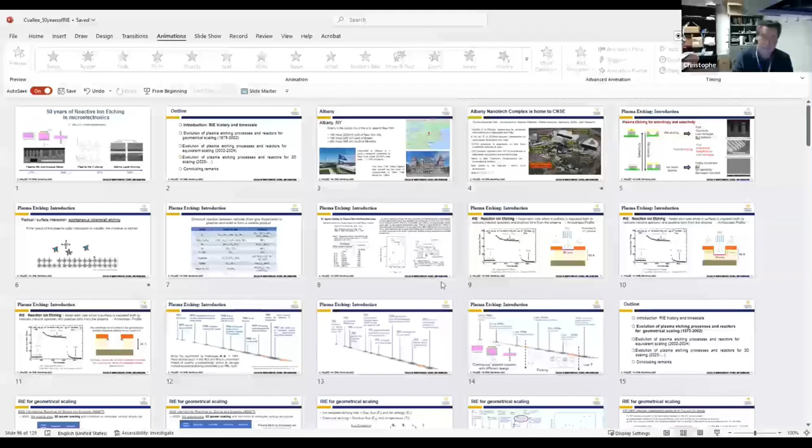So I did a presentation on about 50 years of reactive ion etching. The idea is to show the evolution of the etching processes and the etching reactor, going from plasma RIE with a continuous wave, where we just change the design of the reactor, to pulsing plasma at the beginning of this century, and now going to pulsing everything, for example to go to atomic layer etching. So I will try to illustrate the evolution of the processes and the reactor from the beginning to now, and I will try at the end to give some description of what we can probably work on for the next 5 years or next 10 years.

So this is the outline of this presentation. First I will try to have a very fast history and timescale of RIE. And I will try after to show you how to correlate with the scaling of these transistors. For example, we can do a good correlation between the scaling of the transistor and the evolution of the plasma etching processes and tools.

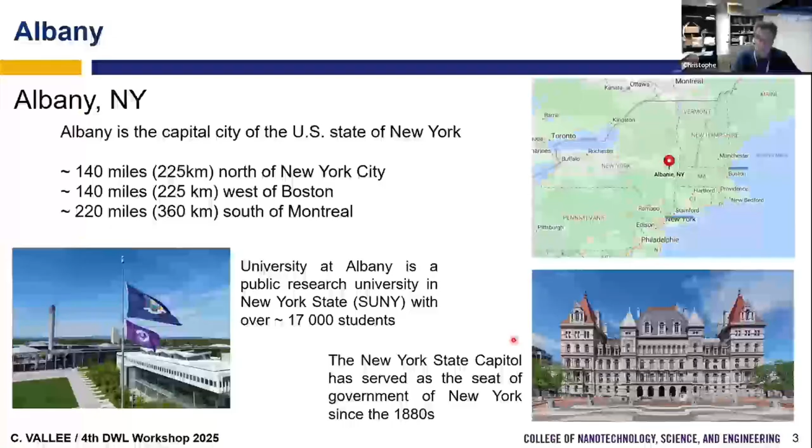So first, just to introduce Albany. I'm professor at University at Albany. So Albany is here, in the New York State. It's about 2 hours and a half by car from New York City, about 3 hours to Boston, and 3 hours and a half to Montreal. So Albany is a New York State capital, and this is where I'm doing my research.

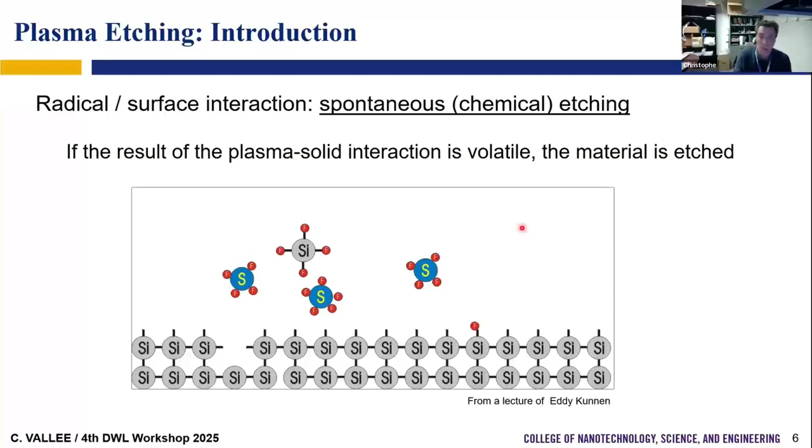So for chemical etching, this is the first step we do when we do plasma etching. We need to understand what can be the volatile byproduct. Depending on what product can be volatile, for a given solid material we want to etch, we have to select the gas we will use for the etching.

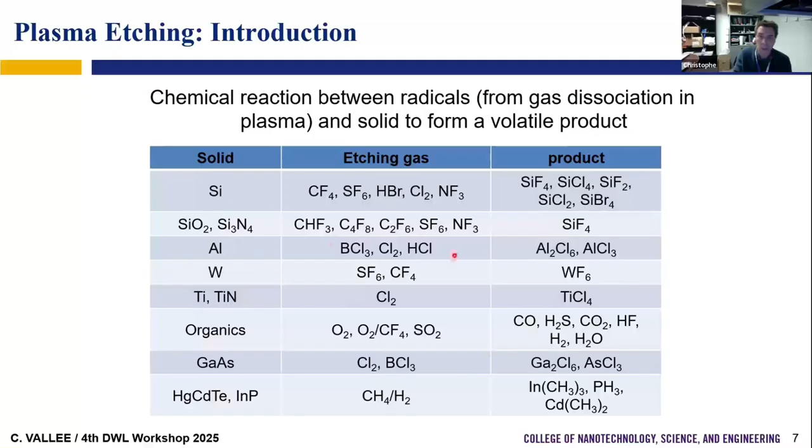So if you want to make SiF4, you select a fluorine-containing gas. If you want to make SiCl4, you select a chlorine-containing gas, and so on. If you want to etch aluminum, aluminum fluoride is not volatile, so you will etch only with chlorine, for example, to make a volatile byproduct. If you want to etch a polymer, you use oxygen to form CO or CO2 and water, which are volatile byproducts. So this is the first step for any plasma etching process, just to understand what can be volatile for etching a solid, so we can design the gas we can use.

What is very interesting is that in 1974, a Japanese group found that we can enhance the sputtering when we want to do the etching, if instead of doing sputtering with a rare gas, we do sputtering with chemical ions. If we have chemical ions, then we can enhance the sputtering. So this is the first paper where people observed that by using ionic assistance with chemistry, we may enhance the etching rate. This is the beginning of reactive ion etching.

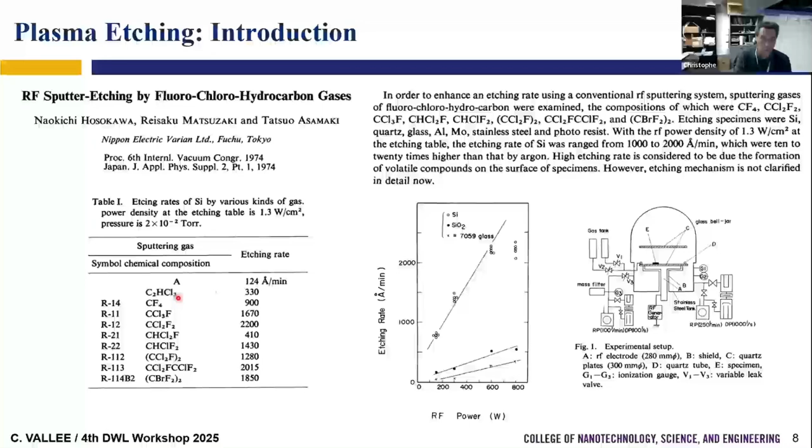You can see a huge improvement of the etching rate compared to pure argon when you use chemical ions. This is reactive ion etching, and it's easy to understand with the work that everybody uses to explain RIE in any plasma class, the work from Coburn and Winters.

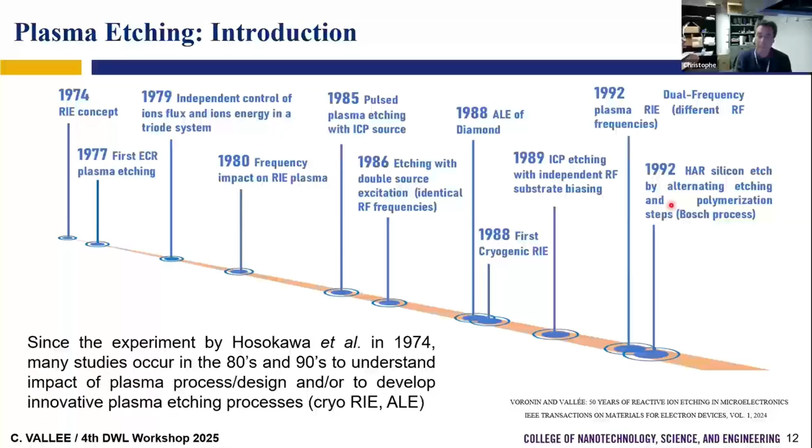Here I gave a sort of timeline of some important research and publications, and I will extract some of these later in my presentation to explain that after this first concept, many people tried to understand how to improve the RIE process by playing with the frequency of the generator, by using for example ICP sources, by having independent RF biasing, by using cryo, by using dual frequency, and so on. So people spent 20 years trying to understand plasma etching and the impact of plasma design and plasma parameters on RIE.

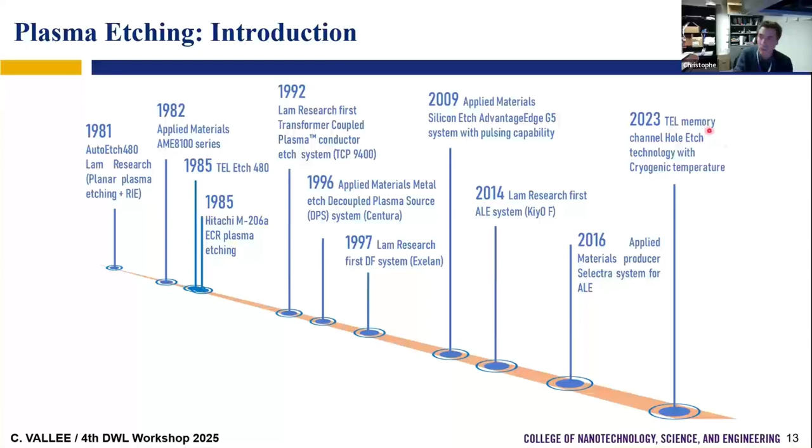So I can take this timeline of reactor generations from industry and select three timelines, and I will discuss today these three timelines.

The first timeline is where we changed the design of the reactor but still had a continuous plasma process, where the power is always continuous and the precursor is always introduced in a continuous way. After that, we have the second type of design where we started to pulse, first the plasma, and after that we also started to pulse the precursor and the gas, going from plasma pulsing to ALE, for example.

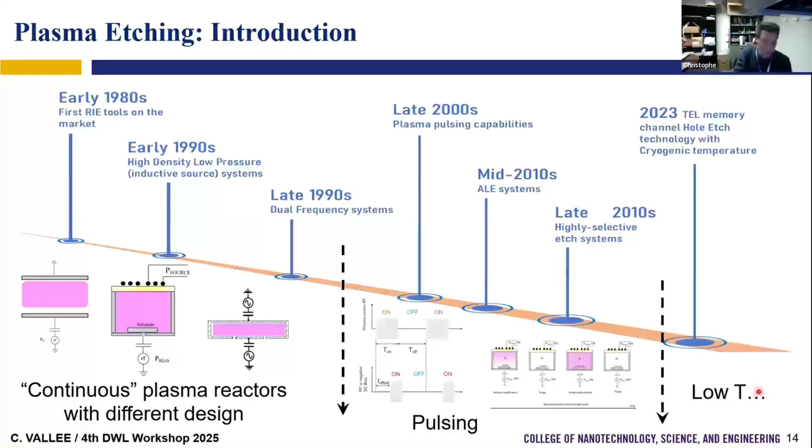And now we have the new generation of reactors, where maybe we have to play with new parameters we weren't playing with before, like for example going to low temperature. So this is the end of this very fast introduction, and now I will talk about the first design, for the geometrical scaling.

This is something I like, what we have for the transistor: we have three areas for the transistor. The first scaling area was a geometrical scaling for the transistor to follow Moore's law, where we did always the same transistor but just reduced its size and dimensions. So it's the same silicon, silicon oxide, polysilicon transistor, but we only reduce all the dimensions to be faster. So we have a size reduction, what we call geometrical scaling, done thanks to lithography.

After that, we add what we call equivalent scaling, when we introduce new materials and start to go from 2D to 3D devices. New materials like high-K, and with high-K we add an equivalent oxide thickness. This is why we talk about equivalent scaling, a second generation, a second scaling area. And from IRDS, it's said that since this year we are entering the third scaling area for the transistor.

This is 3D power scaling, because now we go to complete transition vertical structures. So what I want for today is what I tried to do: identify the etching process and the evolution of the etching process corresponding to each scaling.

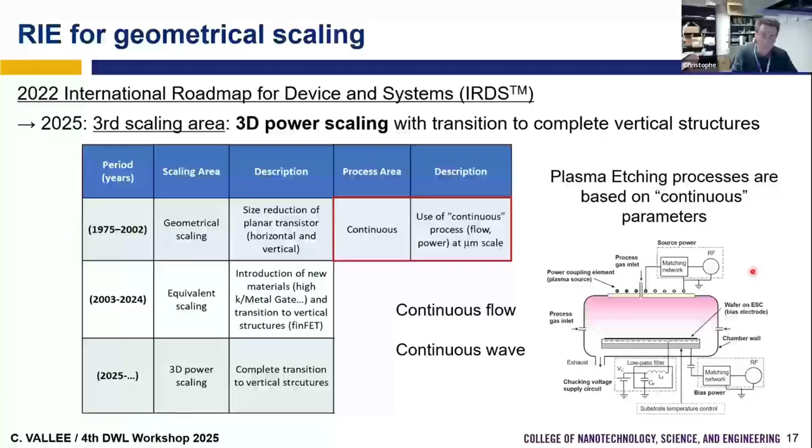Today I will try to focus on the design of the reactor, going from single frequency CCP reactor to high density plasma reactor and dual frequency plasma reactor. So to understand why we did this evolution of the design, I just tried to go back to a very simple understanding of a plasma etching process.

When we do a plasma etching process, we have ion-assisted etching. If the process is mainly based on ion assistance, the etching rate will be proportional to the ion flux and the ion energy. And we have the chemical etching process, where the spontaneous etching depends on the radical flux and temperature. So these are two main parameters every time we have, for chemical etching or ion-assisted etching.

So in the very first generation of plasma etching reactor, I will say single frequency CCP plasma reactor, you apply a power with a single generator. With this power, you will fix the plasma density, so you will fix the ion flux and the radical flux. Usually the temperature is fixed. And depending on the power you apply, you will also fix the DC self bias, so you fix the ion energy.

Each time you modify the power applied to the substrate, if you increase the power, you increase the ion flux, but you also increase the ion energy. This means the parameters are coupled. You cannot only increase the ion flux without increasing the ion energy, or increase the ion energy while decreasing the ion flux. So all parameters are coupled, and none of them vary independently with time.

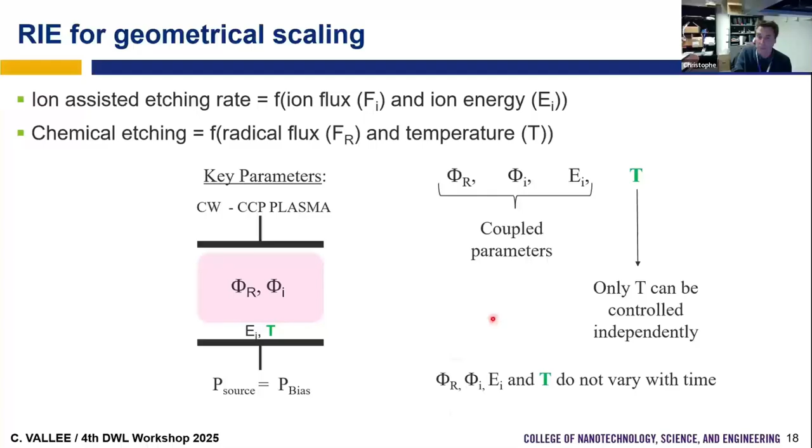So we can understand that, from a processing point of view, to improve the capability of the process, maybe we could ask: can we uncouple some parameters, or can we modify some parameters with time during the process? This is where I go back to some important literature that helps us understand how we can modify a plasma reactor.

The first paper I will take is this one from Australia, from Ron Boswell and Perry, who were first, to my knowledge, to show that we can have fast anisotropic etching with an ICP source. So now we have inductively coupled plasma reactors—we generate the plasma thanks to the inductive field and not the capacitive field, and we have an independent bias of the substrate. So we have two powers: one for the plasma density and one to control the ion energy. This gives very good anisotropic etching, with an independent bias to control ion energy. They were the first, to my knowledge, to demonstrate this fast anisotropic etching with independent RF substrate biasing.

This is the idea of what we call the HDP source or inductive source—mainly inductive, but a microwave system can also be used in the HDP source, where we now have independent control of ion flux and ion energy.

So the idea is, going back to this device: with the power applied to the coil, what we call the power source, you fix the plasma density, so you fix the ion flux. And with the power applied to the substrate, you don't modify the flux, but you modify the DC self bias and the ion energy. So you have a bias power to control ion energy and a source power to control ion flux.

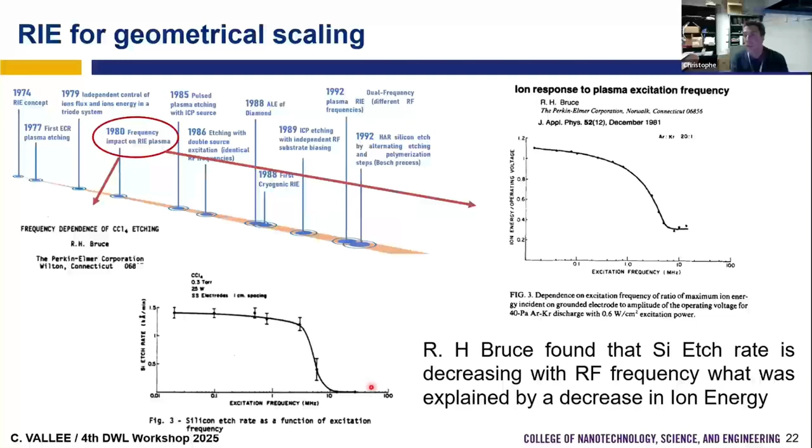So he observed a very huge drop of the etching rate, and the drop of the etching rate was explained by the fact that the energy of the ions is decreasing. So he observed that when we go to very high frequency, we decrease the energy of the ions.

But if you increase the frequency generator, you decrease the peak-to-peak voltage. So at the same time, you decrease the ion energy. And so you decrease the etching rate, as was observed by Bruce.

You not only decrease the ion energy, you can also, with the frequency generator, modify the shape of the ion energy distribution function. If you have a high frequency generator, you have low energy ions with a narrow distribution. If you use a low frequency generator, you have energetic ions with a large energy distribution. So to try to understand this shape, I did a very simple schematic.

First, for example, we use a 13 megahertz generator. Usually this frequency is higher than the ion plasma frequency of the ionic species in the plasma. If we don't consider very light ions like hydrogen, the plasma frequency is several megahertz, so it's lower than 13 megahertz.

So what does it mean? I have ions in my plasma. They are at the plasma potential. I will apply to my substrate an RF voltage, 13 megahertz. So my oscillating frequency is 13 megahertz, and I am oscillating around what we call a DC voltage, VDC, the DC self bias.

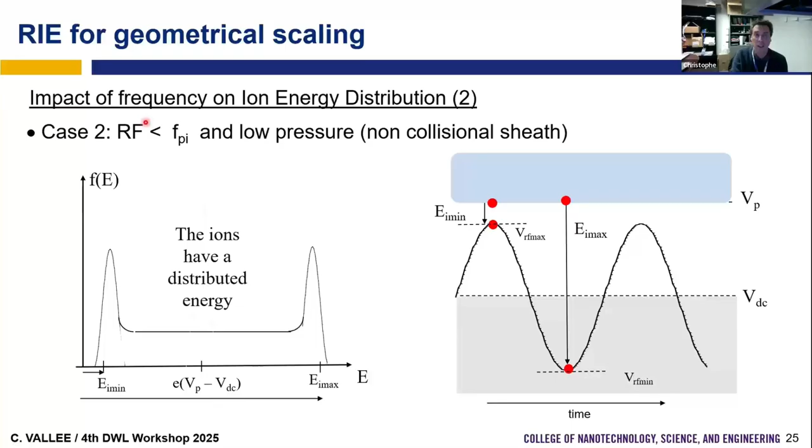Now if I go back to this case where we apply a low frequency generator, for example hundreds of kilohertz, this frequency is lower than the ion plasma frequency. What does it mean? It means that now the transit time for the ion to cross the sheath is very fast compared to the time of the oscillation.

So now the ions will take, as they transit, the instantaneous value of the RF voltage, and not the VDC. So we now have a broad distribution of the ion energy, because they can come from the minimum energy to the maximum energy, taking all the energy in between. So we have a narrow distribution in one case, but the energy of the ions can be much higher than the energy of the ions with a high frequency generator.

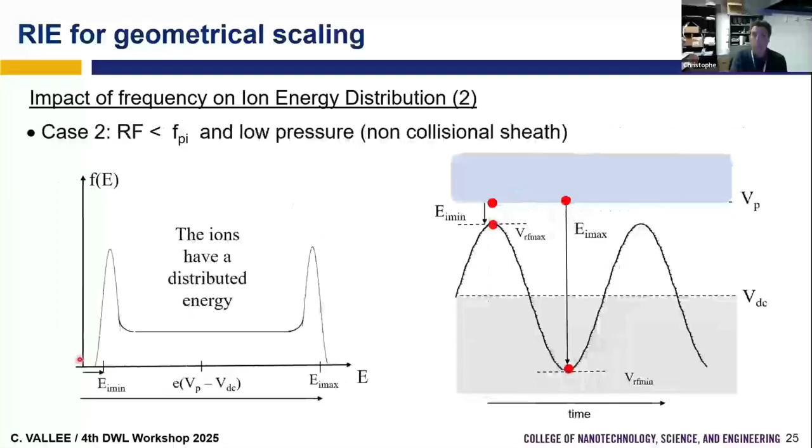So we go back - this is what we obtain: high energy compared to low frequency, and large distribution versus narrow distribution. Usually when we do plasma etching, we have multiple ions with different mass, so what you have on your substrate are ions coming with different energy distributions. It can be very large for light ions, or very narrow for heavier ions. I took here an example of different mass for different ion plasma frequency.

So it has been observed that if we play with frequency, by increasing or decreasing it, we can have energetic ions or low energetic ions. Low frequency generator gives high energetic ions; high frequency generator gives low energetic ions.

And we had the same with the plasma density, so with the ion flux. What we can say is that the power absorbed by electrons is found to be proportional to the square of the frequency and vary linearly with the RF voltage. So for a constant RF voltage, the plasma density, which is proportional to this number, will probably increase like the square of the frequency of the generator. So if you increase the frequency of the generator, you increase the plasma density, so you increase the ion flux.

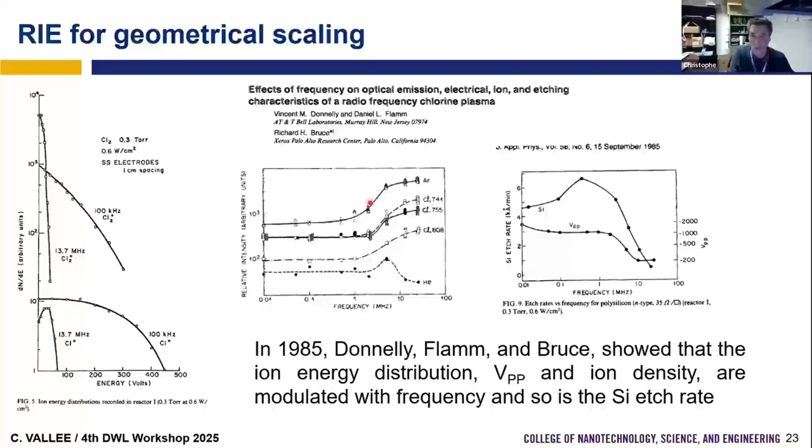And so we go back to what was observed: as you increase the frequency, you increase the plasma density. So we can see we have two opposite behaviors of ion flux and ion energy with frequency. High frequency: more dense, but less energetic. Low frequency: less dense, but more energetic.

So this is what we have, for example, for a fixed power applied to the substrate for a single frequency plasma etching process. If we use a high frequency generator, like an 80 megahertz generator, we'll have a high ion flux. But since we have a very high ion flux, the current flowing to the substrate is high. So for the same power, since we have more current, we develop less RF voltage, or less peak-to-peak.

And if we develop less peak-to-peak, we develop less DC bias. So the ion energy is low. First, we have a high frequency generator - we may have high ion flux, but low energy.

If we use a low frequency generator, in this case 13 compared to 81, the ion flux will be less and the plasma is less dense. But since we have less current flowing to the substrate, we develop more voltage peak to peak, so we develop more DC bias, so we have more energetic ions.

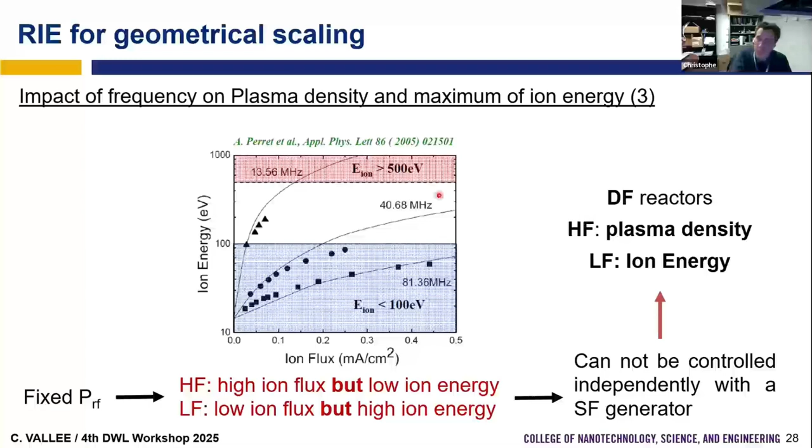So we see opposite behavior of the frequency for the flux and the energy. But if you have a single frequency generator, you cannot decouple them. So the idea is that maybe we can use a CCP with two different generators, where we can have a high frequency generator to control the plasma density, the ion flux, and a low frequency generator to control the ion energy. So this is what we have.

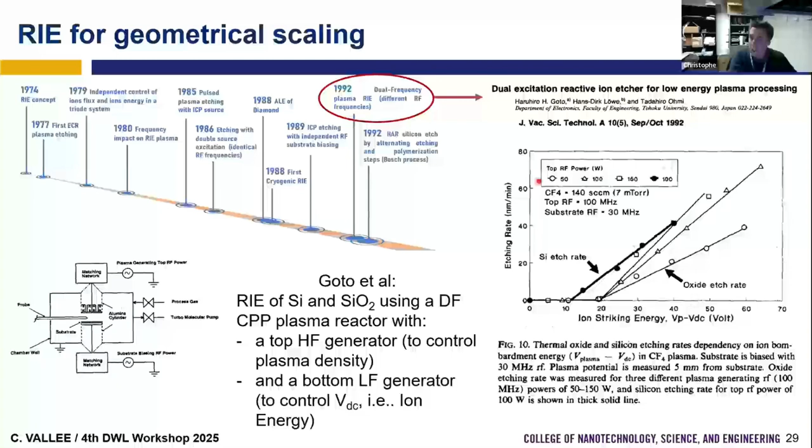Here we have the first paper where people try this idea of doing a plasma reactor with two different radio frequency generators, from Goto, where they use a high frequency generator at the top to control the plasma density, and a low frequency bottom generator to control the DC self bias and ion energy. They study the etching of silicon and silicon oxide using this dual frequency process.

You can see with this paper that depending on the frequency, if you increase the frequency of the generator at the bottom, you will develop less self bias because you develop less peak to peak voltage. So the DC self bias is low, and we say the ion energy is Vp minus the DC self bias, so the ion energy will be low.

But if we use a low frequency generator at the bottom, now we develop more DC self bias, so we have higher energy. So it is better to use a low frequency generator to have high energetic ions coming to the substrate.

And for the top electrode, they also study that if they modify the radio frequency and go to high frequency, they can increase the plasma density. And they look at how it will impact the self bias.

So they have all the results that we had in HDP sources, where we have an independent control of the plasma density and the ion energy, and denser the plasma, lower is the ion energy. So this is what has been found.

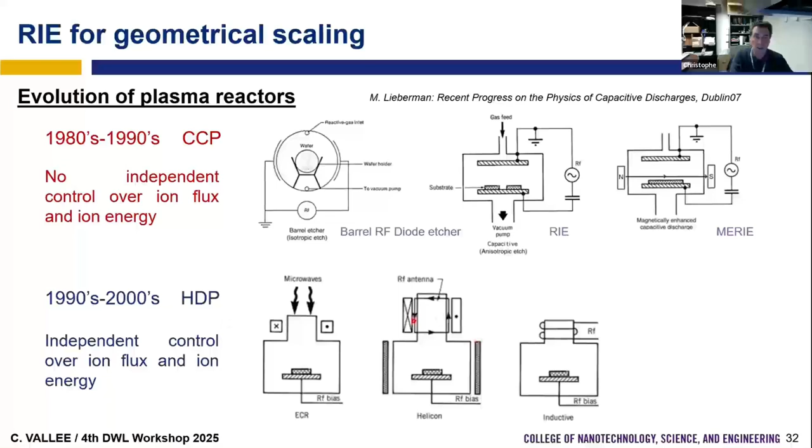And we have the third generation, where we go back to the CCP design, but now we use two or three different frequencies. The frequencies can be applied only at the bottom, two at the bottom, or one at the top and one at the bottom, or one at the top and two at the bottom. So depending on the tool maker, you have very different designs depending on what you want to do and what you want to etch. You may have diode, triode, different designs.

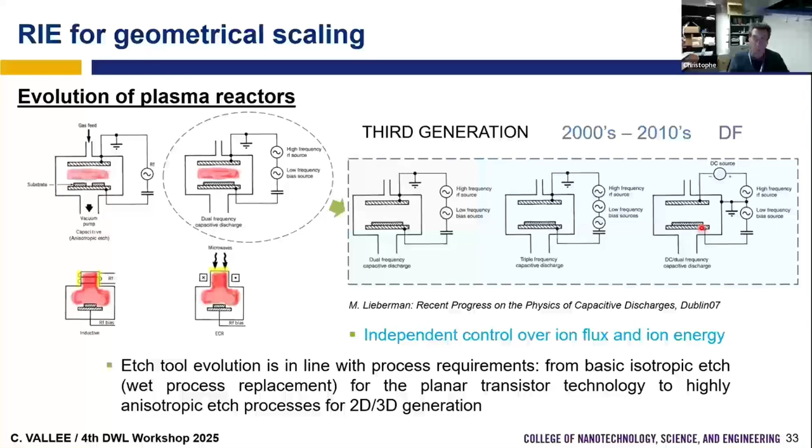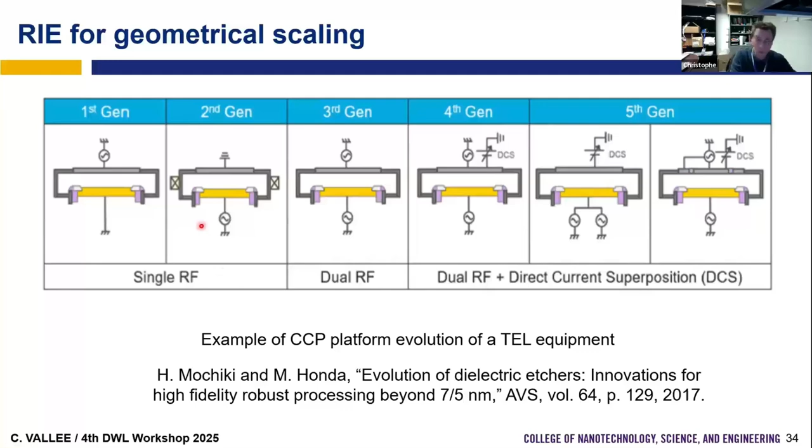When we found RIE and we can use ions, so we modify. Now we apply the power to the substrate to put some energetic ions. After we had started to have dual frequency generators, and the design is modified, now they have superposition of DC voltage for ballistic electrons. You have two different frequencies at the bottom. You can pulse now the plasma. You can add some ALD in the chamber. So you have many evolutions, but you can see an example of the evolution of the design of the CCP reactor for a tool maker like Tokyo Electron.

So this is the end of the first part. Now we go to the second part, which is the evolution of plasma etching processes and reactor for equivalent scaling.

For the equivalent scaling, this is where we introduce new materials and we transition to vertical structures. So we had the FinFET, for example, for the transistor. What we can observe is that we started to pulse. So regarding plasma etching, we started to pulse the plasma.

And after, we started to pulse also the precursor. So the idea is that now we have a decoupling of radical flux and ion flux and ion energy.

But I told you that all parameters are fixed with time. So the question is, can we change the value of the parameter during the time of the process? Can we modulate the ion energy during the process? Can we modulate the ion flux during the process? Can we modulate the radical flux during the process? Yes, no - this is what we will see now.

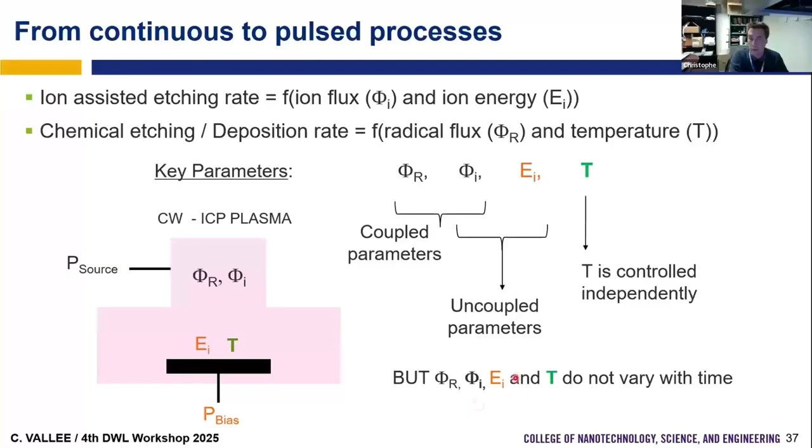So this is the idea: to try now to see, can we have a modulation with time of these two parameters - the ion flux and the ion energy.

And this is yes, if we start, for example, to pulse the plasma - so it means the plasma, we don't have a continuous wave. So now the plasma is sometimes on, sometimes off. The power we apply to the source, sometimes we apply, for example, 500 watts, then we stop applying the power. Then we apply again 500 watts, and we stop applying the power. So we pulse the plasma source.

And if we pulse, we can change the plasma properties with time. And if we change the plasma properties with time, we can modulate depending on the frequency. Usually we modulate the ion flux - we don't modulate the radical flux. And if we modulate the ion flux, we can also modulate the ion energy by pulsing, or by also adding a pulsing of the bias. So we can also try to modulate the ion energy.

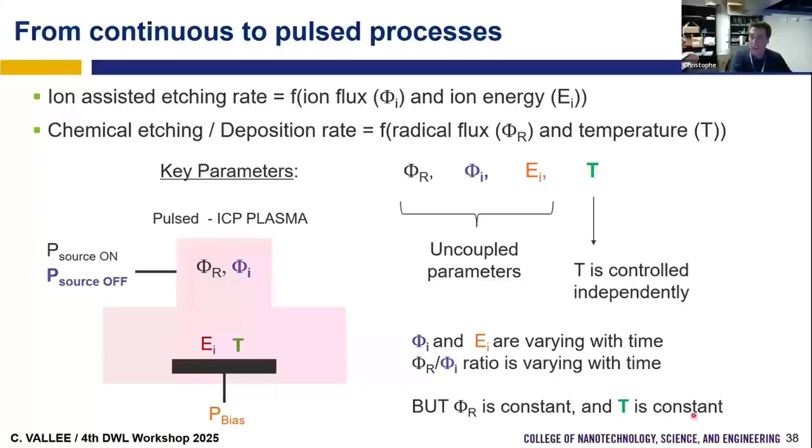So at the end, by pulsing, we can modulate ion flux, ion energy, and the ratio between radical flux and ion flux with time. This is very good for high aspect ratio etching, and for example, to improve aspect ratio dependent etching. It's nice to be able to modulate this ratio. But when we pulse the plasma, the radical flux usually is still constant and the temperature is still constant.

So if I go back to my timeline, you can see that the first time it was proposed to pulse the plasma with the ICP source was this paper. Again, I took this paper because it was maybe one of the first, or maybe the first, again, from Australia. Rod Boswell from Australia did a lot of exciting work, very useful for plasma etching regarding plasma properties - HDP source, pulsing, and so on.

And in this paper, what they did - they were pulsing the ICP generator, pulsing from 1 millihertz to 1 hertz. If I do the base duration - yes, 1 hertz, 1 millihertz - and the duty cycle was 20%. So 20% means that during the plasma on, the plasma is on during 20%. So if, for example, the pulse duration is 1 millisecond, 20% means that during 0.2 millisecond we apply the power, and during 0.8 millisecond we don't apply any power.

They observe that depending on the duty cycle and the frequency of the pulsing, we have no modification of the etching rate compared to a non-pulsing plasma, or we may have a strong modification. They observe that the drop of the etching rate is explained by a concomitant decrease in the energy of etching particles.

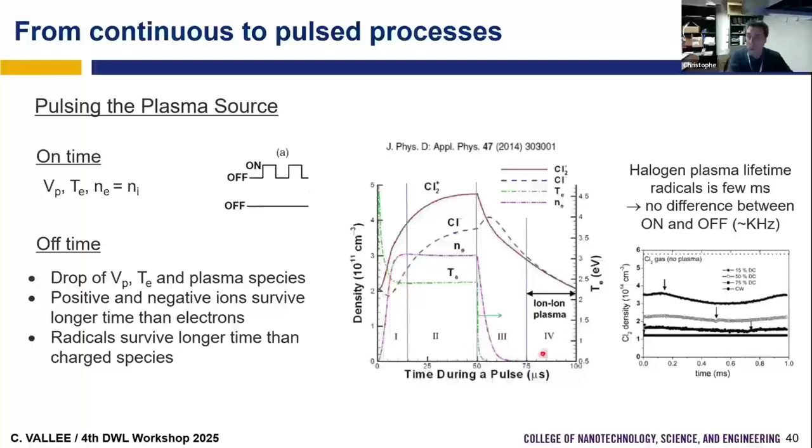So usually when we have an HDP source or a dual frequency process and we want to pulse, we have different ways of pulsing. For example, we can only pulse the source and not pulse the bias, which can be continuous. Or we can pulse the bias and not pulse the source. Or we can pulse both the source, the power applied to the coil for the HDP, and the power applied to the bias.

When we pulse, we can pulse synchronously or asynchronously, with some delay in between. So we have different ways of pulsing: we can pulse only the source and not the bias, or only the bias and not the source, or pulse source and bias synchronously, or with some lag in between. It can be very complex.

So it means that we may have a strong modification of the plasma. I mean, when I said the chemistry, it's because usually when we pulse, since we have a lot of off time, we get more molecular species than atomic species. So usually we observe a modification of the chemistry of the plasma with more molecular ions or molecular radicals versus atomic ions or atomic radicals. And we also modify the ion energy and the distribution.

So if you decide just to pulse the source, usually it's to modify the ion flux versus the radical flux. When we pulse the substrate, the idea is to modify the ion energy. So we can synchronize, in phase or out of phase.

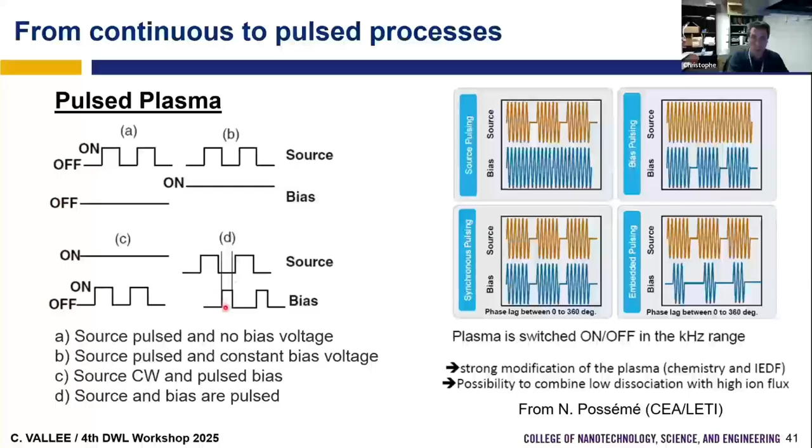So now you have more energetic ions. You may be in the case where you can have very high energetic ions going to your substrate. This can be good, and you can improve your whole plasma process. You can improve etching rate, selectivity, aspect ratio dependent etching, all the different issues you may have, but it can also be bad sometimes.

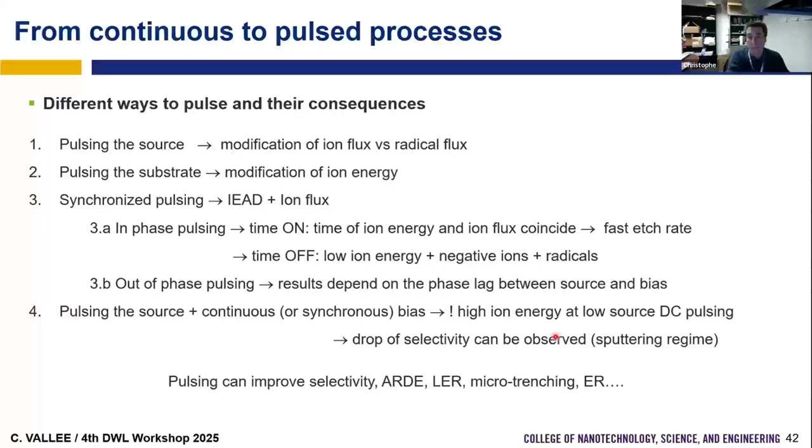So it's very good because you have more knobs, more parameters to tune, but for a process engineer it starts to be very complex to understand the plasma process because you have more and more parameters. Now we go from single frequency CCP generator where we only had to play with flow rate, chemistry, pressure, and source power. Now we have HDP source where we have flow rate, pressure, chemistry, source power, and bias power. And now we have the same when we pulse the source power, we pulse the bias power. So it's more complex to optimize, to develop BKM and understand your process. So now you really need people who are expert in plasma etching to understand.

This is an example of how you can improve aspect ratio dependent etching. Aspect ratio dependent etching happens because depending on the aspect ratio, we don't have the same number of radicals going into the trench. And since we don't have the same number of radicals, we don't have the same etching rate depending on the aspect ratio. So when you have high aspect ratio, usually you have slower etching rate compared to low aspect ratio. But now if you pulse, you can play with the pulsing to try to compensate. During the off time of the pulse, you will have more radicals than ions. So you can compensate and try at the end to have no aspect ratio dependent etching, so that whatever the feature, high or low aspect ratio, you etch at the same rate.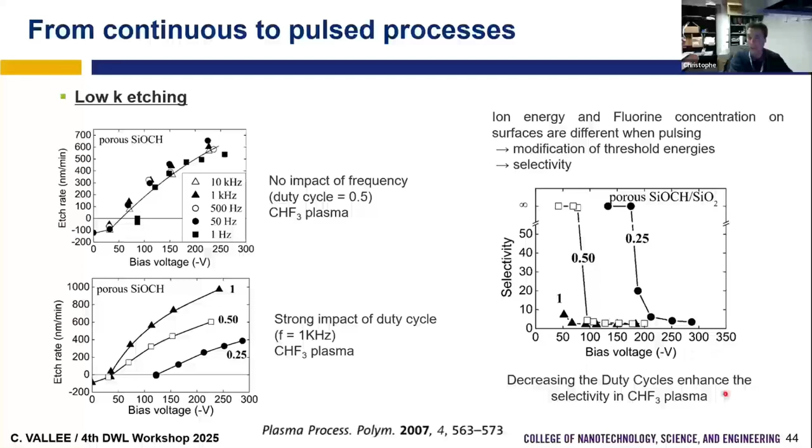This is another example for low-K etching. If you pulse, depending on how you pulse, you can modify the ion flux and concentration of species at the surface. And if you modify the concentration of species at the surface, you may modify the threshold energy for the etching. For porous low-K, if you don't pulse, or depending on your duty cycle, so if you have 25% duty cycle, you will modify the bias voltage you need to start etching the porous low-K. So if you modify the threshold voltage, and if you want a selective process between low-K and silicon dioxide, you can modify your selectivity by pulsing. You can see you may have a huge modification of selectivity and go toward sort of infinite selectivity when pulsing, in this example, a CHF3 plasma.

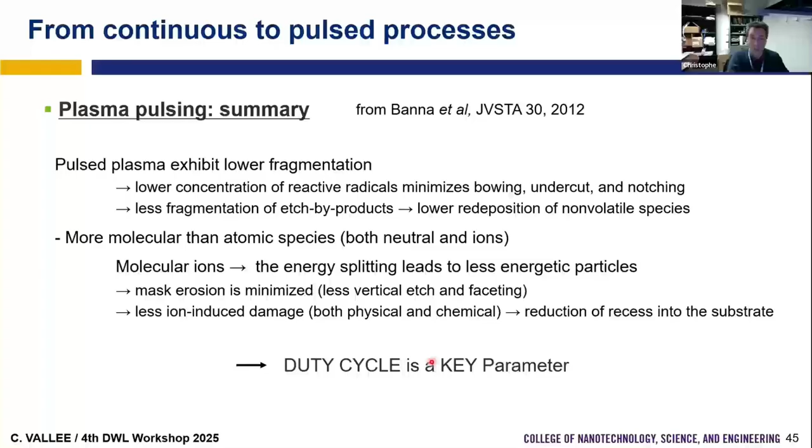I will not talk about chemistry too much today because I think you'll have other sessions for that, but if you have to keep one thing in mind, usually when you pulse you also change the fragmentation of the plasma. So your plasma, when you pulse, is never the same as a continuous wave plasma. Usually what I say is the plasma you have when you pulse is more molecular than atomic, and this can be a benefit. What is the most important parameter when you pulse? Usually it's not the frequency - we observe that frequency doesn't have so much impact, going from 1 kilohertz to 5 kilohertz is not so important. But the duty cycle is very important and has a strong impact on the plasma etching process.

So the benefit of pulsing the plasma is that you have more additional knobs. You can modify the plasma chemistry and ion energy distribution with time, which you could not do before. Now you can modify over time, and you can combine low dissociation and high ionic flux. But since you have more parameters, you increase the complexity of the process. And usually regarding throughput, if you pulse, if you have less time on, so less time of RIE - energetic ions with radicals - you usually observe a decrease of the etching rate.

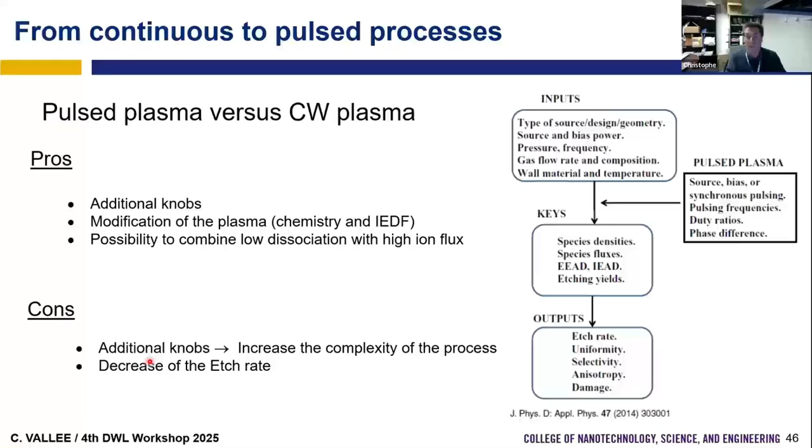So this is what we have by pulsing the plasma. Now we use an HDP source to decouple, and we pulse the HDP source. If we pulse the HDP source, we decouple, but we also vary ion flux energy with time, and vary the radical to ion flux ratio with time. But the radical flux is still constant, because the radicals survive longer than the off time. So we do not really modulate the radical flux by pulsing, and temperature is still constant. So the question is: can we now modify the process to also pulse the radical? This is where we go from RIE with continuous etching to processes like atomic layer etching. I took the design of an HDP source where you have the source power and the bias power - so all is continuous.

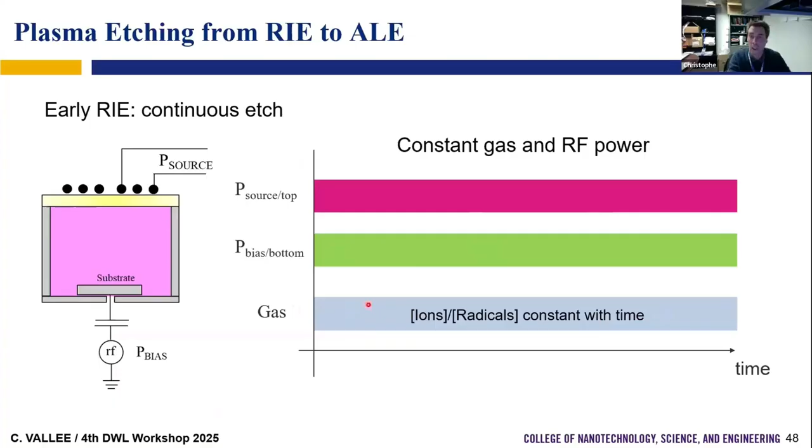First generation of reactor, you remember, the power is continuous to the source. We have continuous power applied to the bottom, and the gas is introduced in a continuous way.

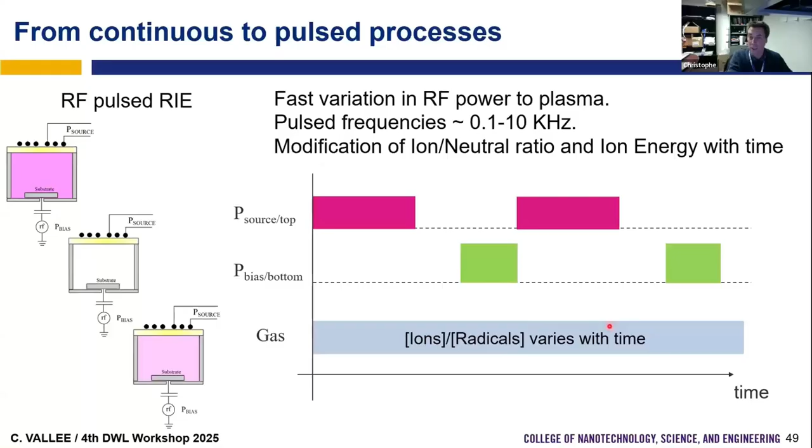Now we started to pulse the RIE process, so we pulse the plasma. We can pulse the source, we can pulse the bias, and we can now have a variation of ions to radical. But the radical is still constant.

You can imagine that the next step is to pulse now the radical with time, to not have the radicals only introduced in a continuous way. So sometimes we introduce the etching radicals, sometimes we introduce the molecule Cl2, and sometimes we don't.

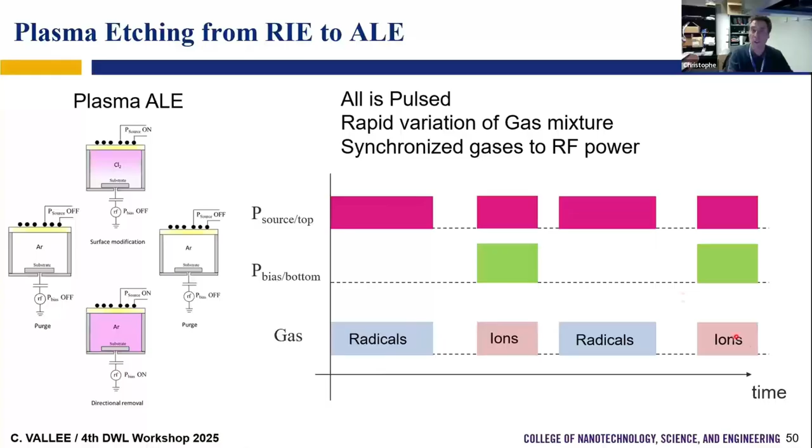So now we can also imagine that we can maybe pulse the radicals or pulse the ions. We not only modulate the ion flux, but maybe we can vary the radical flux with time by pulsing the gas. And if we have an HDP source, when we only apply power to the source we have radicals, so we have a chemical etching, a sort of radical etching process. We only throw radical to the surface, and then after we apply a bias to have energetic ions. So we have ionic flux with energy, and we can pulse to have successive steps of radical and ions, and this is where we go for atomic layer etching.

So this is what we develop for atomic layer etching, and the same design as atomic layer deposition, that we have two steps of reaction. We pulse the gas, and during the first gas precursor, we use it to modify the chemistry at the surface of the substrate. Thanks to the modification of the chemistry, we use a second pulsing to have energetic ions, and we do a sort of selective etching. We only remove the layer that has been chemically modified, and we don't remove the layer below.

So we only remove, for example, one monolayer. If every time we modify one monolayer, at the end of the process we only remove one monolayer, and then we repeat as many times as we need, depending on how many monolayers we want to remove. The same as for ALD, but ALD is the opposite. We want to add the precursor, and after we want to modify the precursor, not to remove one monolayer, but to add one monolayer, and we do the layer per layer deposition. Here we do layer per layer etching.

So this is ALE, atomic layer etching process, and this is ALD. So this is the idea that we have 4 steps for both the ALE and ALD process. For ALD, we try to understand how many growths we do with one cycle. The sum of the 4 steps is what we call growth per cycle, and usually it's about 1 angstrom per cycle, 1 monolayer. Every cycle you will add 1 angstrom, so you control the growth by the number of cycles.

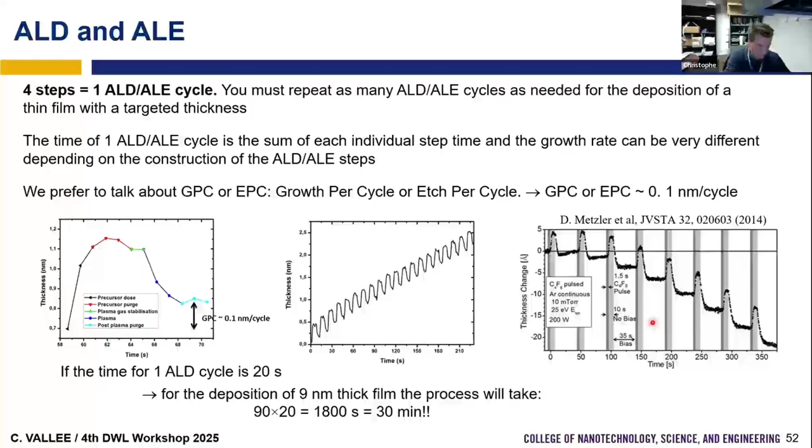Regarding the semiconductor industry, we use more and more ALE, but ALE is more complex to develop, because ALE is a sum of 4 steps, and we have n cycles. So it means that to optimize your ALE process, you need to optimize all the steps and the cycles, while it's only one step of optimization for RIE. And ALE is very slow, so it means the throughput is not good enough.

So we can try to imagine, can we find something between ALE and RIE to have a sort of pulsed RIE, where we pulse the plasma and we pulse the gas, that could be ALE-like? So we have the advantage of ALE and the advantage of RIE regarding the complexity and the time of the process. So can you reduce the process time? This is what I will try to show you.

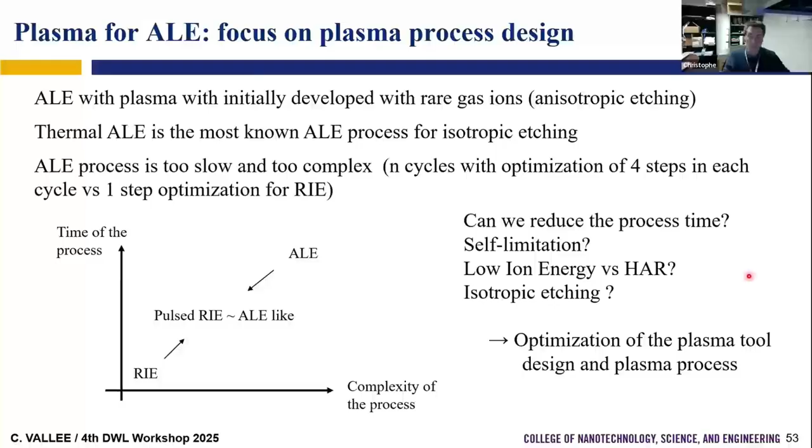So this is the basic ALE process we use with plasma. We can do thermal ALE, but today I will not talk about thermal ALE, isotropic ALE. I will only talk about anisotropic ALE, because we talk about reactive ion etching, which is an anisotropic process. So for anisotropic ALE, usually we have four steps of surface modification. You have a first step, surface modification - for example, we do chlorination.

So we do a chlorine plasma, or you can flow chlorine gas, but usually we do chlorine plasma. Then we have a second step, so we have no more plasma, just to remove the chlorine. And then we have the argon plasma to bombard with ions to remove the modified layer. This is the activation step, what we call directional removal, so it's a directional plasma ALE. And after we have the purge to remove, and then you repeat. So this is what we do.

You can see that the plasma ALE process, or directional ALE, is based on two processes: surface modification with a gas, and ion sputtering. So this is what is illustrated here. We do chlorination and we sputter with ions the film that has been modified.

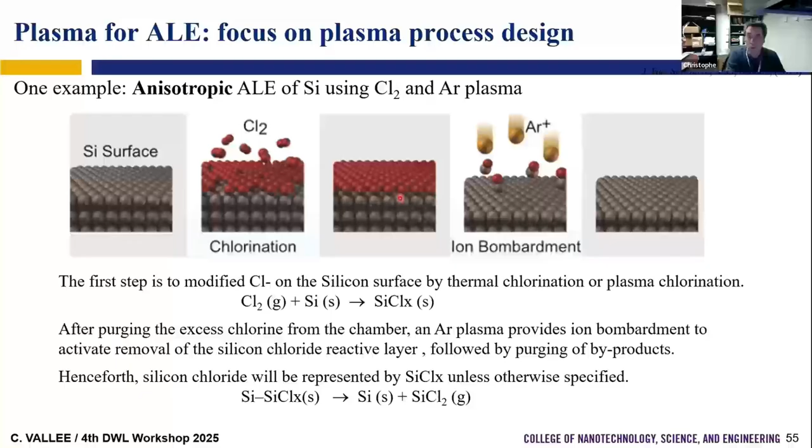So why do we only remove one monolayer? It's because the binding energy for the silicon atom in the bulk and the binding energy for a silicon atom bonded to chlorine is not the same. Usually we have a weaker binding energy for a silicon atom at the surface when we do chlorination than in the bulk. And you know that the sputtering threshold, when we do sputtering, depends on the binding energy of the material. So if we have two different binding energies for this top silicon atom and the bulk, we have two different sputtering thresholds. And what we have to optimize is the ion energy to be in between the two sputtering thresholds, so we only sputter the first monolayer and we don't sputter the second monolayer.

So what is illustrated here: when we do the modification of the first surface layer, we have a given sputtering threshold, and the silicon atom in the bulk doesn't have the same sputtering threshold. So if we come with the ion energy in between, we should remove only this atom at the surface, and we should not remove the atom in the bulk.

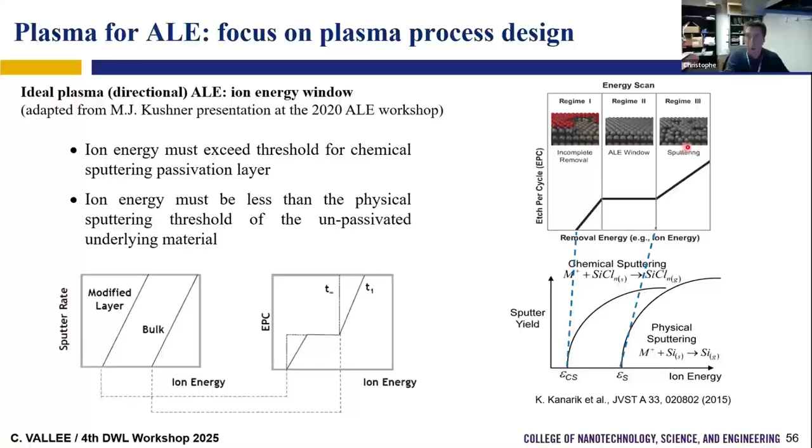So we have an optimum ion energy to select. If the energy is too low, we do not remove this atom, so we don't etch. If the energy is too high, we sputter also the bulk, so we don't have a self-limiting process when we remove only one monolayer. So what is important is how you can modify the surface energy compared to the bulk.

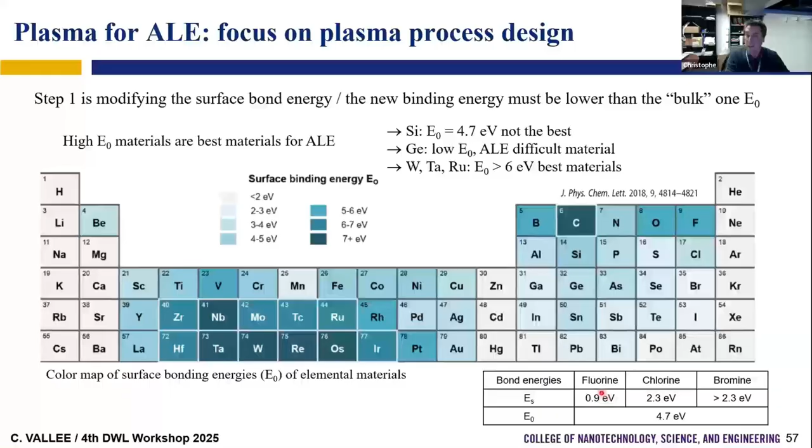So here's an example for silicon. If you have only silicon atom in the bulk, the energy is 4.7 eV. But if you do chlorination or fluorination, you reduce the binding energy, so you modify the sputtering threshold for the atom at the surface bound to fluorine versus the atom in the bulk. So I took here the example of tantalum. Tantalum is very nice because we have a huge contrast between the surface binding energy after chlorination and the bulk, so the difference is very high. You have a large window of energy where you can sputter only the tantalum atoms bonded to chlorine, and not sputter the tantalum atom in the bulk.

Now with ALE, the main issue is that if you want to do selective etching, depending on which material you want to selectively etch versus another, you need to sputter one material and not the other. For example, if I want to etch silicon selectively to gallium nitride, all my ions should come with an energy between 40 and 50 eV, ideally. If they come with less, I will not sputter any of the material. If I come with more than 50, I will start to sputter gallium nitride and not be selective.

So it means that it's very challenging, and we have to think about the bias waveform we use for directional ALE, because most of the waveforms I've shown you don't have a narrow distribution. We have a more or less large distribution, and remember, it depends on the ratio between the frequency of the generator and the ion plasma frequency. So here you need a very narrow distribution if you want to perfectly etch silicon versus gallium nitride with the ALE process.

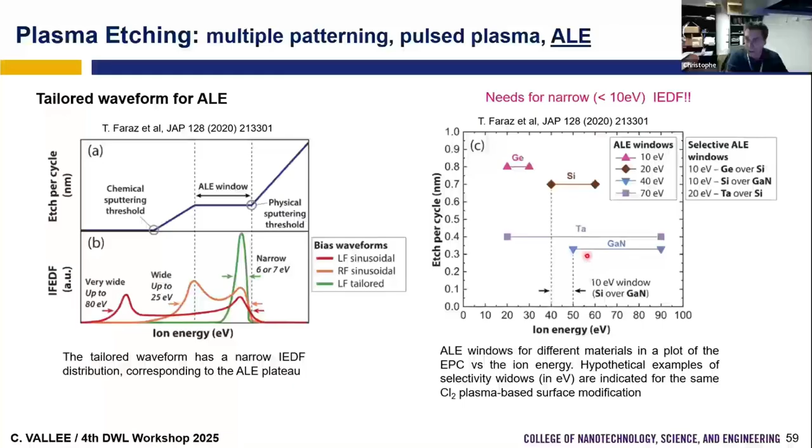So now I will try to show you how we can modify the ALE process to make it more compatible to throughput. So what we do in the fab, for example.

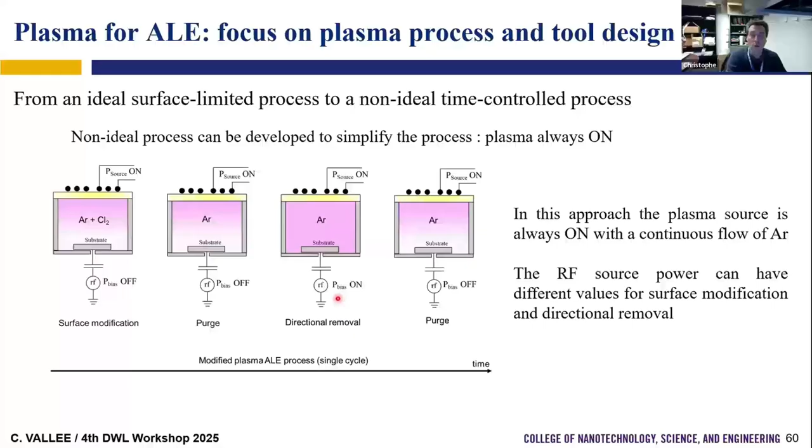But if we want to go faster, we can also simplify, and no longer pulse the chlorine - we only pulse the bias, and play with the duty cycle to try to have an ALE-like process. It's more challenging because since at the same time we have chlorine and argon, we may have an RIE process, which is what we usually have with RIE. So you have to find an ideal duty cycle and frequency so that during this step we don't go to RIE, but have a self-limited atomic layer process. But you can find papers where people were successful developing an ALE-like process by only pulsing the bias.

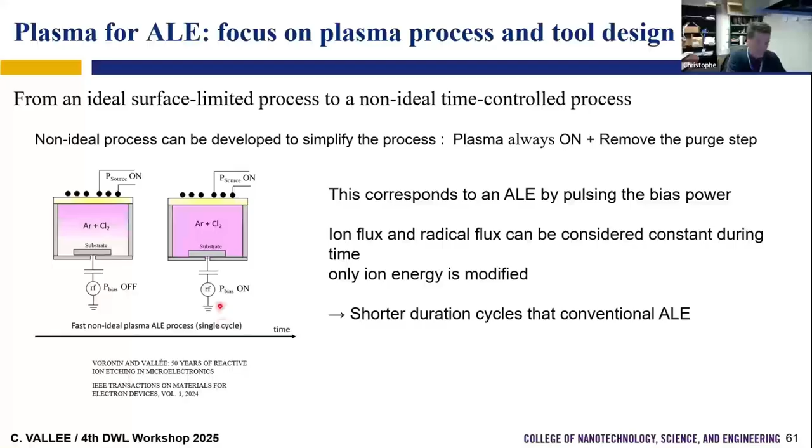Here is an example of what we do, for example, for silicon oxide versus silicon nitride, and I took an example of a process from Tokyo Electron. This is a fast quasi-ALE process from Tokyo Electron.

And here we don't do any surface fluorination - we deposit a very thin fluorocarbon layer at the surface. So it means that, in fact, we don't have a self-limited process, because as long as we increase the time of this step, we increase the thickness of the fluorocarbon layer. It's not self-limited.

So it means it's more a time control process, a thickness control process. You have to optimize this step to get the thickness of the fluorocarbon right, to be able to do your etching process through the fluorocarbon layer like any RIE. And so the etch per cycle will depend on the fluorocarbon thickness deposited in the first step, and that thickness will depend on the time of the first step. So it's a time-controlled ALE process, not a self-limited ALE process. This is quasi-ALE - this is an example.

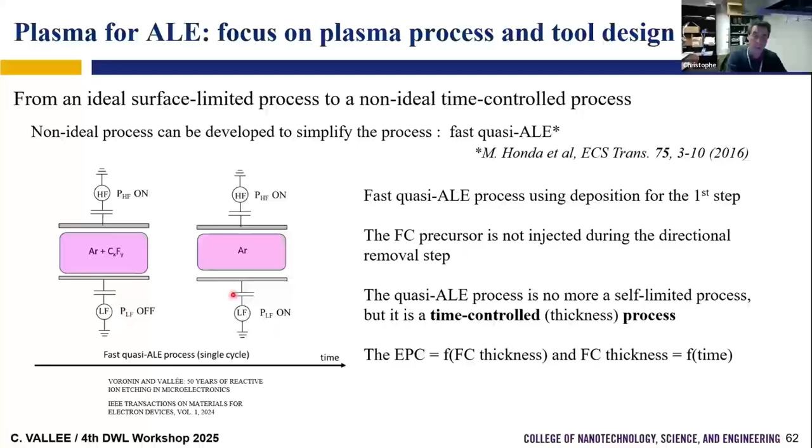But after, when we do a fast quasi-ALE process with fluorocarbon, it's important to understand that we have some wall contamination with fluorine species, and the wall contamination may add an RIE etching component during the removal step. During the removal step we want to have only argon, but residual fluorocarbon can be desorbed from the wall, bombarded by argon.

Desorbed and go there, so we may have an unwanted RIE process. This may add some fluorocarbon combining, so we may have a modification of the etching process, and we have some transients. To have the selectivity of oxide versus nitride, we need to first develop a thick enough film on silicon nitride, and it may take some cycles to get a thick enough film on silicon nitride so as not to etch silicon nitride versus oxide.

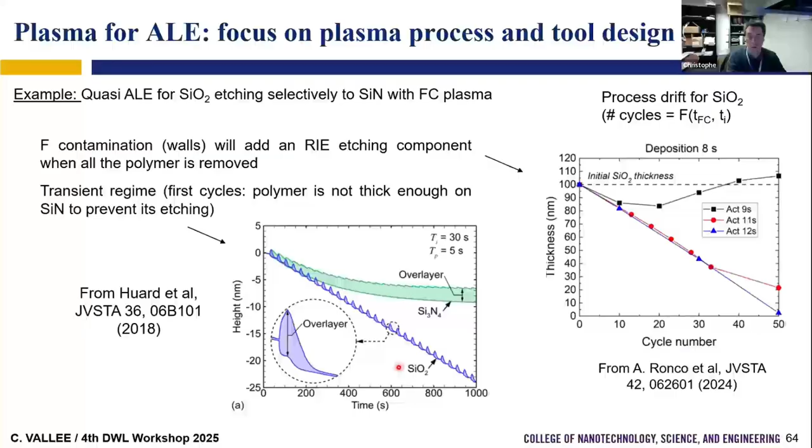So we may have some transient regime where we may start at the very beginning to etch also silicon nitride versus silicon oxide. Another design, and to simplify the most, is the advanced pulsing from TEL again.

So I keep the example from TEL, where we still have the atomic layer etching with fluorocarbon, but now the fluorocarbon is no more pulsed. We only pulse the plasma, and we play with the on-off of the source.

So when the source is on, at the low frequency we have high energetic ions bombarding. When the source is off, we have only radical species flowing, with no energetic ions, but many radicals.

And we play with the duty cycle to control the dissociation rate, so to modulate the F etching agent versus the CF2 depositing agent in the plasma, and so control the plasma chemistry. So it's an advanced pulsing, but you need fast gas switching that will match the RF matching. So this is my last example.

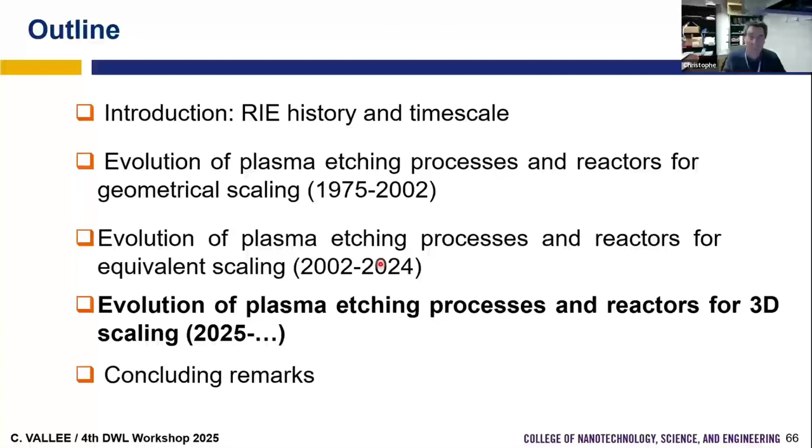So you see, for the second scaling area, we went from the HDP source, then we started to pulse the plasma, and now we started to pulse the gas, so we can complexify the process even more. Now we are entering the 3D power scaling area.

For the 3D power scaling area, all is 3D, and what is important is that we need a highly selective process, but not only anisotropic etching. Now we know we need also to develop a lot of isotropic etching.

So we will need to develop also plasma etching that will not be RIE, because ionic assistance is for anisotropic etching. So it means at the same time as we need to improve the RIE process, because we have high aspect ratio and high selectivity requirements, we need to improve the RIE process.

We need to find a way to improve this. At the same time, we need to maybe go away from the RIE process to go back to some spontaneous etching, radical etching process, because we need isotropic etching, like for nanosheet.

And what I think will be the most important parameter to try to play with is the only one I did not modify with time so far. From all the parameters, only one was kept constant - remember, it's temperature. So maybe we'll see more and more processes where we try to play with temperature.

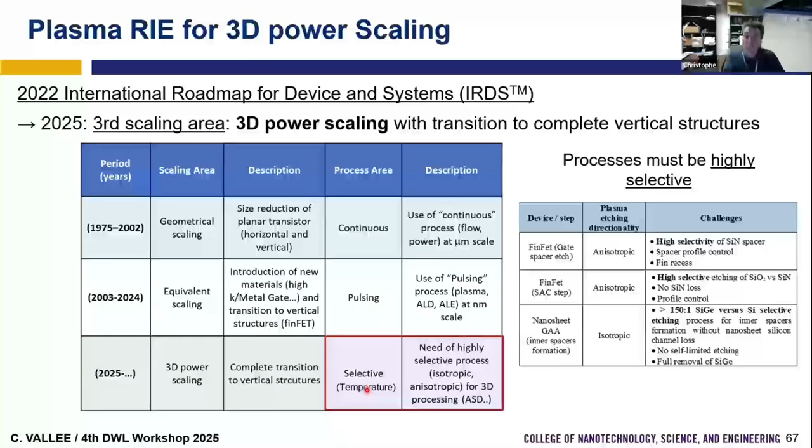And maybe in the future we should be able to try to modulate the temperature with time, but it's very difficult. So this is an example of what we have now and what we try to develop for the next generation of etching - some example can be cryo etching.

We have more and more cyclic etching where we introduce a deposition step. We have to introduce non-sinusoidal power, so we have to change the RF bias waveform. So I told you, for example, we need to control the very narrow ion energy distribution, so maybe we have to go from RF to pulsed DC, more and more pulsed DC.

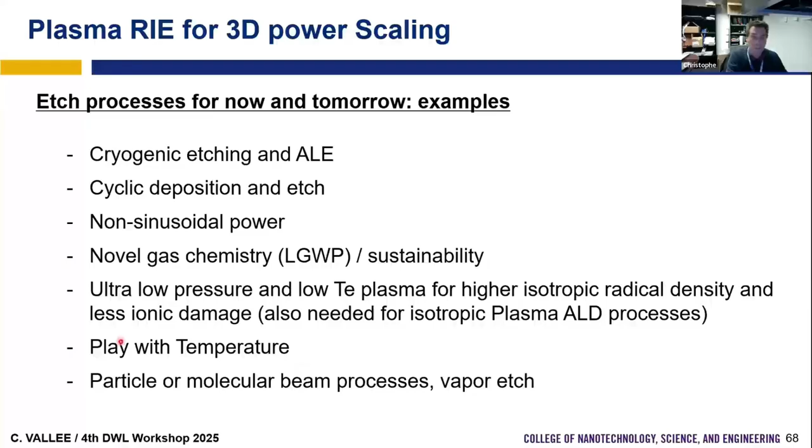We have to develop new gas chemistry because regarding global warming, we have to find solutions to replace some fluorocarbon gas, and it's very challenging. We have to play with this for sustainability, we have to play with temperature, and we have to develop more isotropic etching like molecular beam or vapor etch.

So first I will talk about low temperature and cryo. If I take the two components we have when we do etching, we have radical flowing, so we have spontaneous etching, controlled by the radical flux and the temperature. And we have reactive ion etching, which is controlled more by the ion flux and the ion energy, and to modulate the ion energy, the threshold is what we use, for example, for selectivity in plasma ALE.

If we have spontaneous etching, we can say we can play with temperature to try to tune for selectivity. So if we have isotropic etching and more, maybe we have to play more with the temperature to modify the selectivity. And one example of playing with temperature -

so temperature is not varying with time here, but we do the opposite of what usually we do for etching. Usually when we do an etching process, we want to favor desorption and to form volatile byproducts.

Since desorption follows an Arrhenius law, usually when we want to etch and increase the etch rate, we go to high temperature. So with a plasma process, we usually say that if we go to low temperature, we favor condensation, so deposition. And if we go to high temperature, we favor etching.

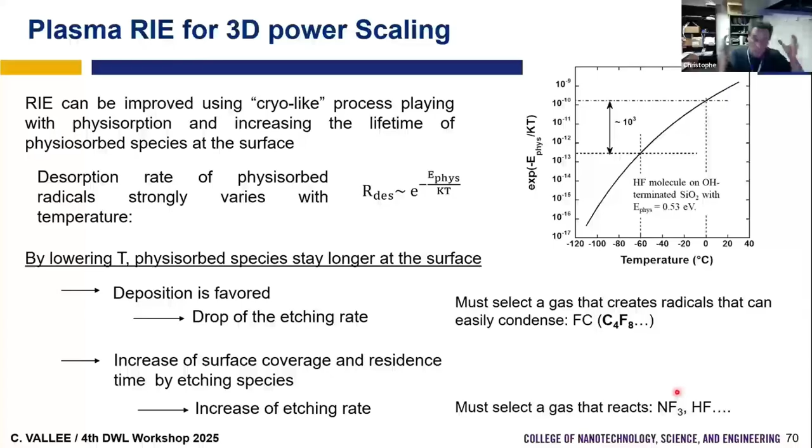But if you have some gas that won't do any condensation, that will only physisorb, and you can have just 1 or 2 monolayers of physisorption, then the etching gas can stay longer at the surface. For example, with the HF molecule, if you go from room temperature to -60, you increase by 1,000 the lifetime of HF molecule at the surface. And if you increase the lifetime of this HF molecule, the etching gas, then when you add ions, you increase the etching rate. So it's very nice.

This is what was proposed, for example, in 2023 by Tokyo Electron, when they said they developed for high aspect ratio 3D NAND a new process where they use very low temperature, so cryo etching. Using cryo etching, they can do high aspect ratio etching, and in addition reduce gas use by 84%, which is better for global warming.

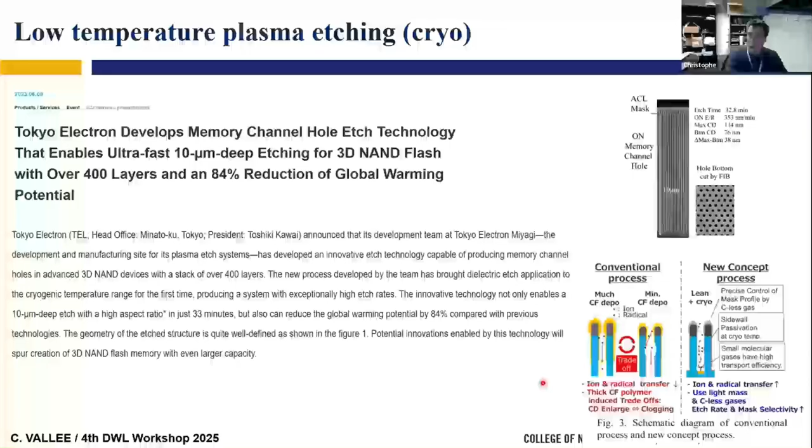Because when we use the cryo etching process, they can enhance the etch rate, so they etch faster, and they have very good selectivity, as they don't have the issue of too much fluorocarbon deposition, because they play with the physisorption. I took this illustration from the paper they presented here in 2023.

From the paper, you can see they use a CCP reactor, with the design using dual frequency. Remember, high frequency controls the plasma density, low frequency controls the ion energy. So they have the CCP, and what they did was a

CF4H2 plasma. When they do the CF4H2 plasma, they observe that if they run the process at room temperature or nearly room temperature, adding hydrogen to the CF4 gas reduces the etching rate, which we can easily understand because CF4 is etching, H2 is not etching, so fluorine is the etching species. So if you dilute CF4 with H2, the more H2 you have, the less etching agent you have, so the etching rate drops.

Okay, easy to understand. But if they do the same at -60, for a given hydrogen dilution, they increase the etching rate before it drops, and they increase it to very high values compared to the traditional value at room temperature. So now they multiply the etching rate by 2.5 going to -60 degrees while they dilute. If you compare this etching rate to the room temperature one, you have a huge enhancement of the etching rate.

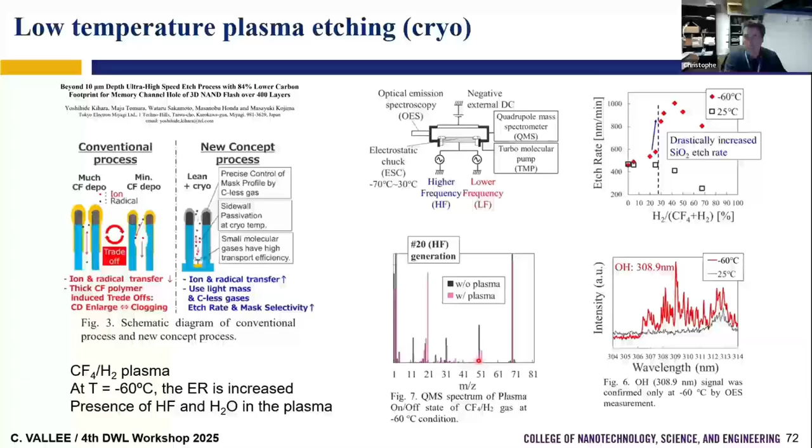To try to understand why, they did some plasma characterization, and by OES they observed the emission of OH. So they observed some OH in the gas phase, and with mass spectrometry they also observed some HF in the gas phase. And so this is what they explain.

So they said that when we do CF4H2 plasma, we form HF because we dissociate CF4 into CF3 plus F, and we dissociate H2 into H plus H. So the H atom will react with F to form HF, and HF will go to the surface. And remember, if we go to -60, which is why I did this calculation, you increase by 1,000 the lifetime of HF molecule on the surface. So if you have more HF, when you add the ions, if you have more etching agent on the surface, you will promote and enhance the etching.

And in addition, they observed that they had some water. And in fact, it is said that the water is aiding the etching, because we know that when we do HF vapor or HF etching of silicon oxide, if we add water, we have a catalytic effect. This water promotes the etching of SiO2 with HF, promotes the bonding of fluorine to silicon. And then by the presence of water coming from the first etching reaction, where we form water, we enhance the etching rate. And with the ions, you add the ions to enhance this reaction.

So it's not that you use temperature, you use ion energy. With ion energy, you promote this reaction, you enhance it, and now you do a lot of etching of silicon oxide, forming SiF4. This reaction was also proposed to explain the fast etching with the CF4H2 plasma. So this is the idea.

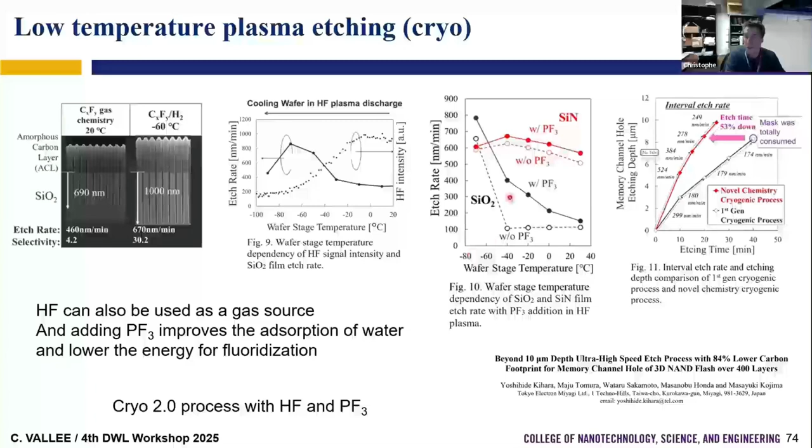So this is, for example, the Cryo 2.0 system from LAM Research, where we have the HF and PF3 introduced for the etching, and you do the etching at minus 60, minus 50, or minus 70 degrees Celsius. So this is where we are, and now LAM is proposing a Cryo 3.0, and probably they still have the same gas, but they don't say what they have inside. It's just maybe a slight improvement.

Second step of improvement of what we do for the next generation of etching: we'll probably develop more and more etching where we add a deposition step in the etching step. The idea to add a deposition step is to have some corrective step. So for example, you do your high aspect ratio etching, and you may have some unwanted non-uniform profile because you have ions reflecting, for example, from the mask, so you may have unwanted non-uniform etching.

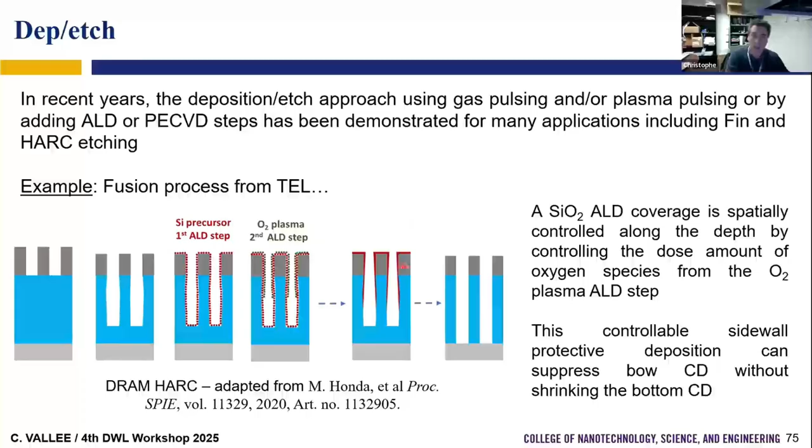So what you can do is that during the process, you can add some ALD deposition step, and depending on the ALD step and its control, you can deposit only on the top. So you can deposit there when you are losing some material, to try to redefine the profile and then to propagate a very good profile for the etching. This example was proposed by Tokyo Electron, what they call the fusion process, where some ALD deposition steps are introduced inside the plasma etching process.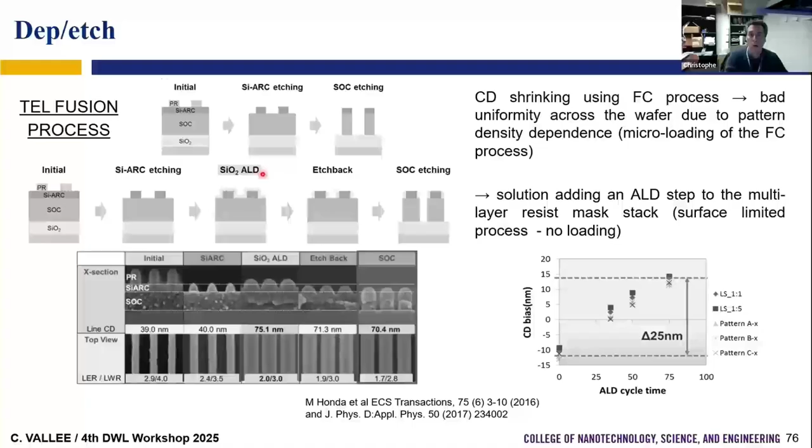And this is the same example, showing the improvement regarding the CD bias when they add some ALD step inside the plasma etching process. So this is combining deposition and etch, and we are combining more and more deposition in the etch process and etch process in the deposition process. Another challenge we have for high aspect ratio etching is the control of the ion energy.

What is important to understand is that when we do high aspect ratio etching, we want to have energetic ions coming to the bottom, because we need to do the etch at the bottom. But the ions come perpendicular to the substrate thanks to the bias, and they also have some lateral velocity because they have some energy. So depending on the ratio between the two velocities, they don't have a perfect angle of 90 degrees. So you have some dispersion, what we call ion angular dispersion.

And usually you can calculate this angle of dispersion, which corresponds to the ratio between the sheath voltage and the ion thermal energy. So if you calculate this angle, the issue is that depending on this angle, most of the ions will never be able to come to the bottom. So if you want them to reach the bottom for high aspect ratio structures, you need to reduce this angle.

So you can try to calculate what should be the maximum angle for a given high aspect ratio. And you see that as you increase the aspect ratio, the ion angular distribution must go from, for example, 20 degrees to less than 1 degree, compared to 90 degrees plus or minus 1 degree, to be able to have ions coming to the bottom of the structure when you have an aspect ratio of 140. So the only way to reduce this is to increase the sheath voltage, meaning increasing the bias voltage you apply.

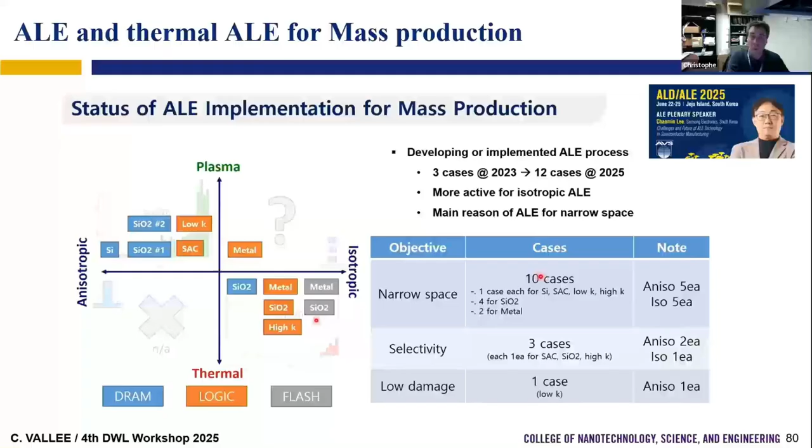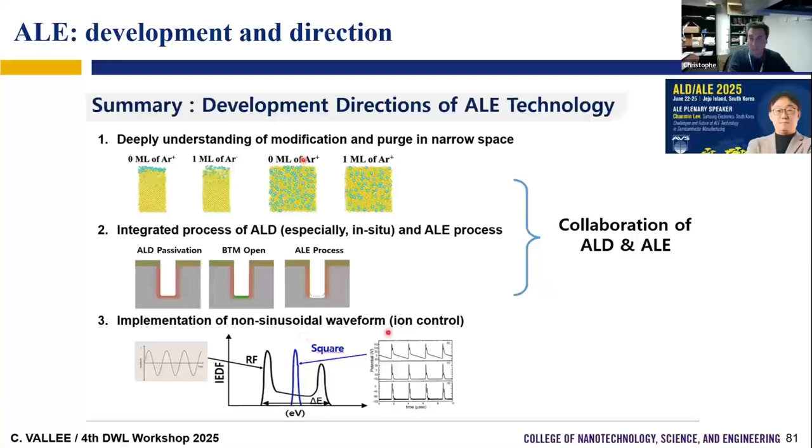And in the future, we need to develop more and more isotropic processes because we will have, for example, nanosheet applications. We need to have more and more isotropic etching. This is the same slide to say that what they have to do in the future, for example, is to combine ALD and ALE. So, as I said, combine deposition and etching, and use different bias waveforms to have a narrow energy distribution.

For sustainability, it means that we have to plan all these parameters when we want to have a sustainable process. So we have to optimize for the future of the process regarding gas consumption. We have to use low global warming gases to understand the impact on the wall. So usually we have to clean the wall, or we have to control the nature of the wall when you do an etching process.

If we can avoid contamination of the wall during RIE, we don't need any plasma cleaning step or plasma seasoning, so we can reduce the number of steps. So we have to improve abatement. This is where we have to work for the future regarding sustainability.

And regarding global warming, I just gave you this table to understand that some gases we are trying to use now and test for the future—we have two options. Going from CF4 to other gases, or C4F8 to other gases, we have some molecules where we add iodine, for example, or some bigger fluorocarbon molecules. If we use bigger fluorocarbon molecules or if we add iodine, we can reduce the lifetime in the atmosphere, so it's better for global warming.

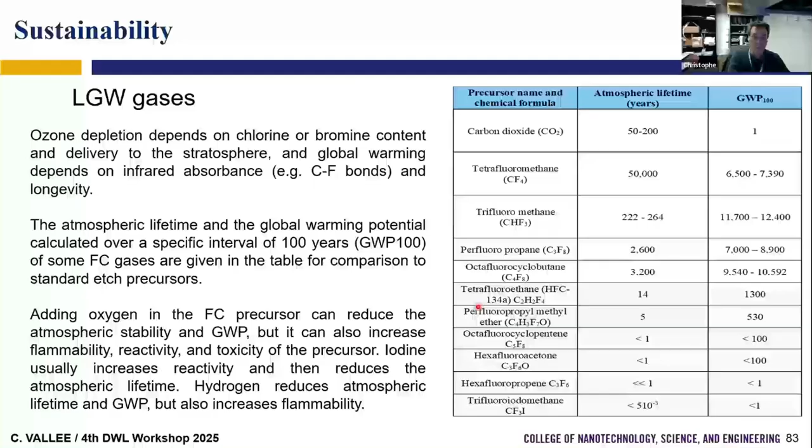My last two slides will be examples of isotropic etching. So if we want to etch now for nanosheet, we need to have isotropic etching. It means that we need to develop more and more vapor phase etching or molecular gas phase etching. It's not good for RIE—we no longer use ions. But people working in industry on etching systems need to develop new equipment to be able to do the selective isotropic etching that will be needed in the future.

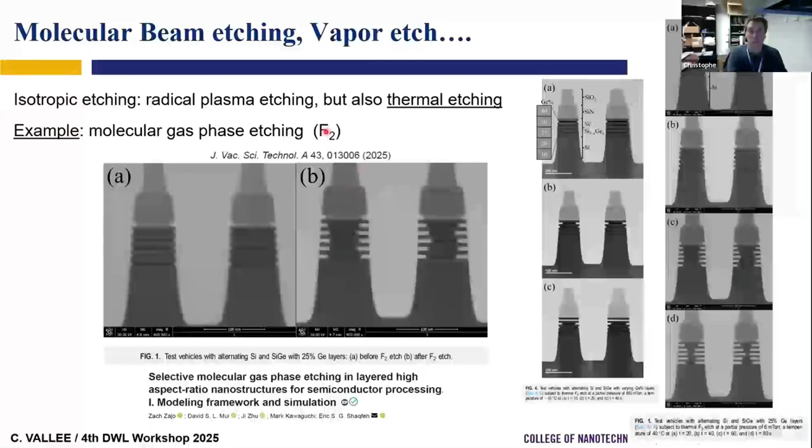This paper is a good example of how we can do nanosheet etching using F2 gas. This is an example I took from Tokyo Electron's website, from investor relations, just to show you the tools they try to sell now.

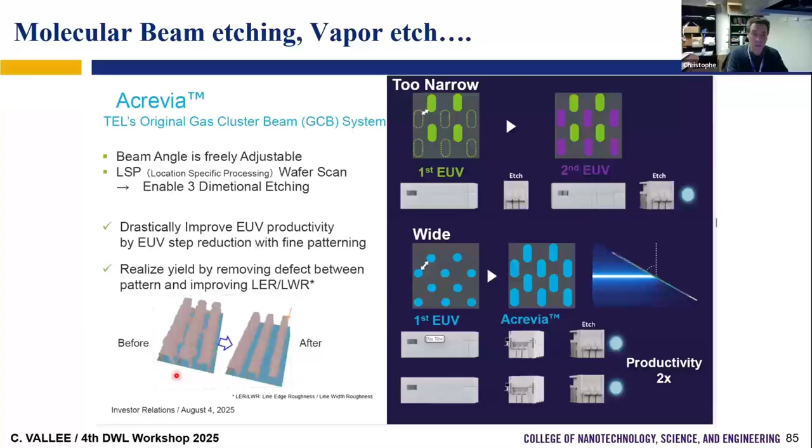If you look at Tokyo Electron, they have what they call a gas cluster beam system, used to try to have a better control of the ion energy. They want to etch not with very big molecules, but a cluster of ions, to try to have less impact regarding roughness due to the ions.

Regarding logic, DRAM, and NAND, they have to develop specific equipment. For example, new equipment where they can go from RF bias to pulse square bias. As I said, it's what they call HERB for their technology.

Because if you have pulse DC, we have only energetic ions. If we have RF bias, we have low and high energetic ions. The low energetic ions have a large ion angular distribution. Only the high energetic ions will come to the bottom. If we have a DC pulse, we have only energetic ions, so they all come to the bottom.

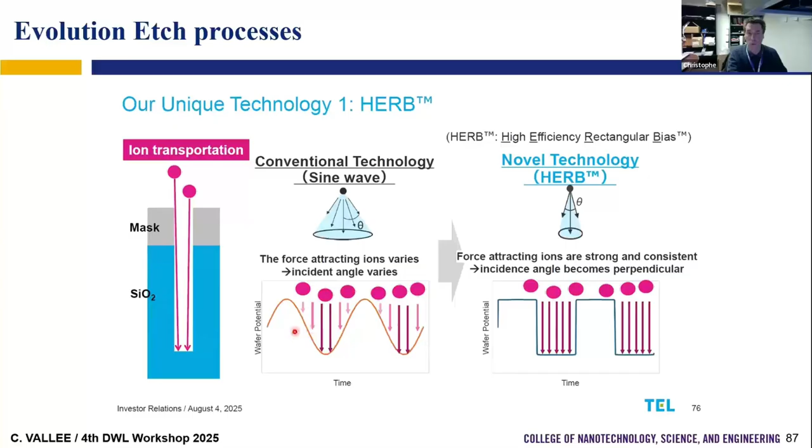So we try to remove this distribution, to remove the low energetic ions that will not go to the bottom, and we try to improve our high aspect ratio with radicals. So these are the tools they use for cryo etching.

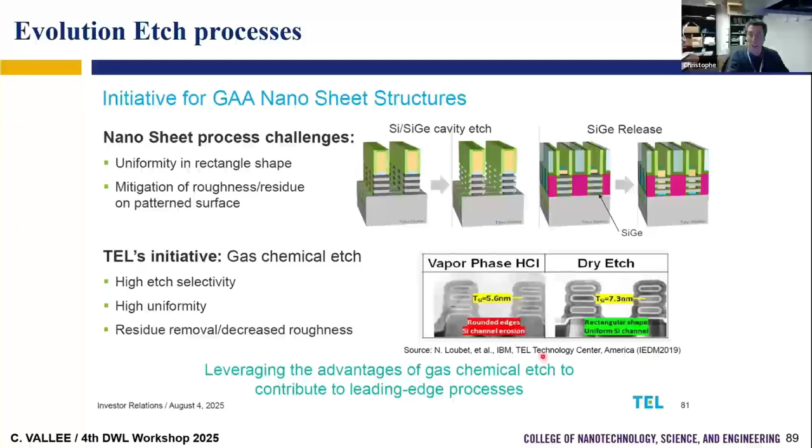To conclude: this was the first generation of plasma etching reactor, where everything was coupled, nothing was varying with time. Then we used a second generation, like dual frequency and HDP source, to uncouple two parameters, but everything was still fixed, not varying with time.

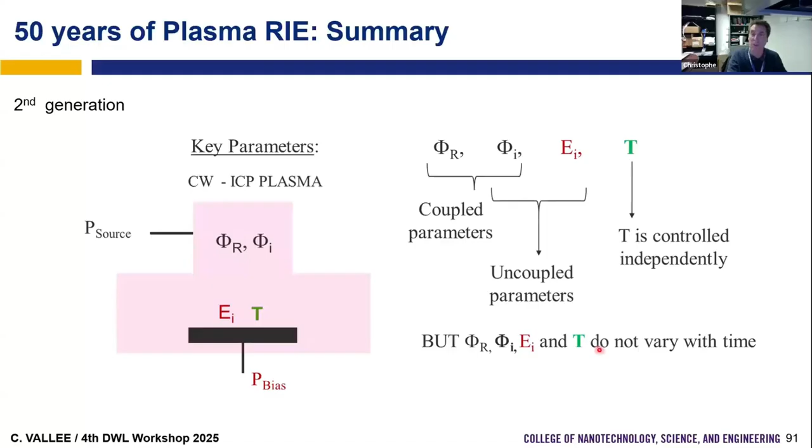Then we had the third generation, when we pulsed the gas and pulsed the plasma, to uncouple all parameters and vary with time the ion flux, the ion energy, and the ratio between radical flux and ion flux. The last generation pulses not only the plasma but also the gas, so now the radical flux is also varying with time.

But still the temperature is constant. So now we have new processes where we try to understand the impact of temperature, like cryo etching, but we don't have processes where we can vary temperature with time.

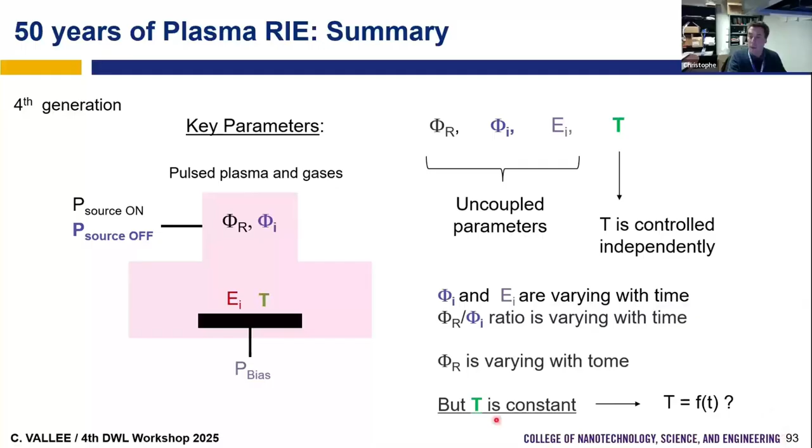To my knowledge, there is only one tool that's very interesting, from Hitachi, where they have infrared lamps so they can modulate the temperature during the process. Because if you want to modulate the temperature with the substrate, it takes a very long time under vacuum to go from high to low temperature, so it's not possible.